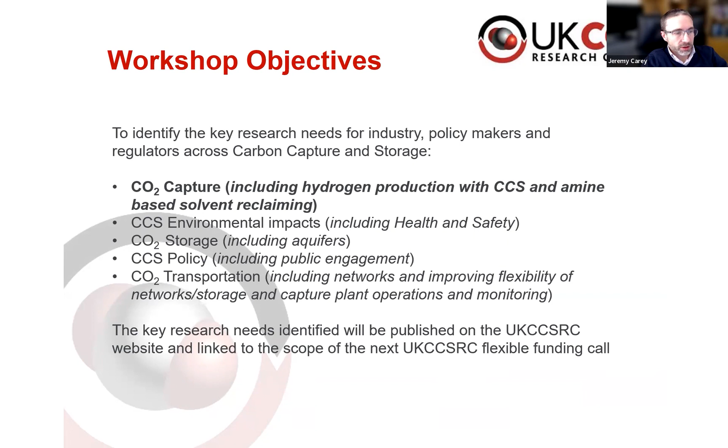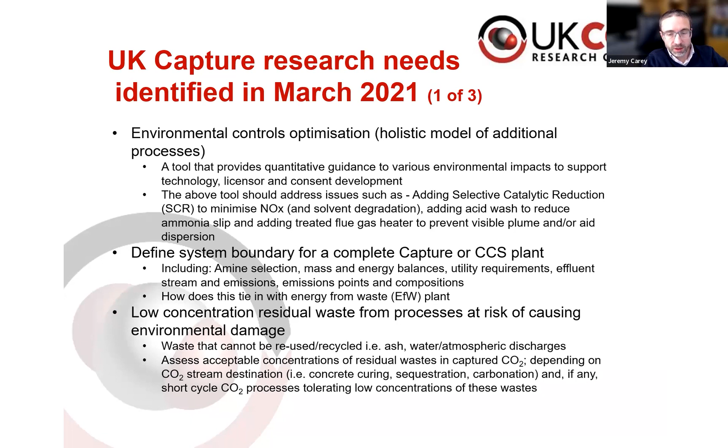Building on some work that's been done in the past around research needs that have been previously identified. There is obviously ongoing interest in environmental controls. There's the interesting question of where do you draw the system boundary. There's dealing with waste and kind of risks of consequential environmental damage.

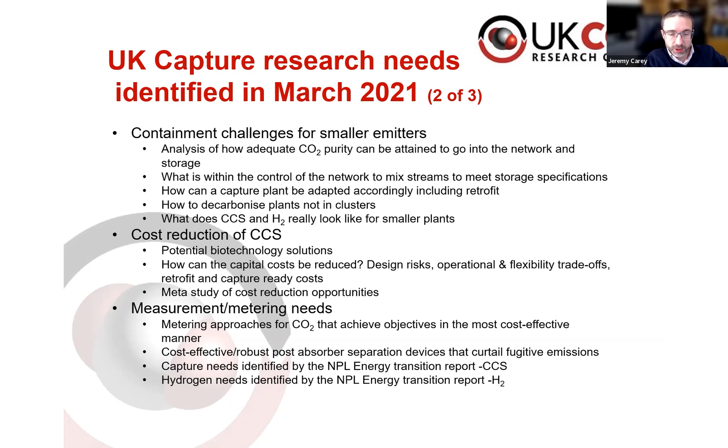We've got the challenge of smaller emitters. There's been a number of little bits of work done recently on how much CO2 is enough to make it worthwhile capturing it. The ever popular challenge of cost reduction and measurement and metering, particularly fiscal metering, I guess, in there, and concentrations.

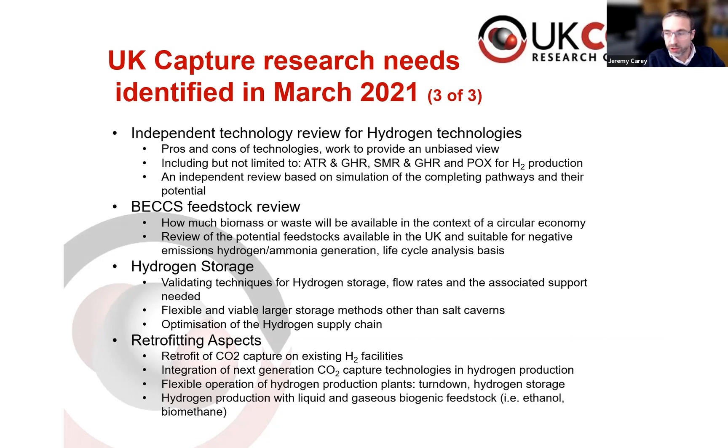But before we get into all that, we've got these series of presentations, and I think the first one is from Petrofac. So I think we're ready to go to Chet.

Good afternoon, everyone. I'm Chet Biliyok. I'm the technical director at Petrofac Energy Services. I'm pleased to present to you what I think are the research needs for carbon capture and hydrogen. This is based off experience of projects we've recently delivered or we are currently delivering right now at Petrofac. Just a bit of information about Petrofac.

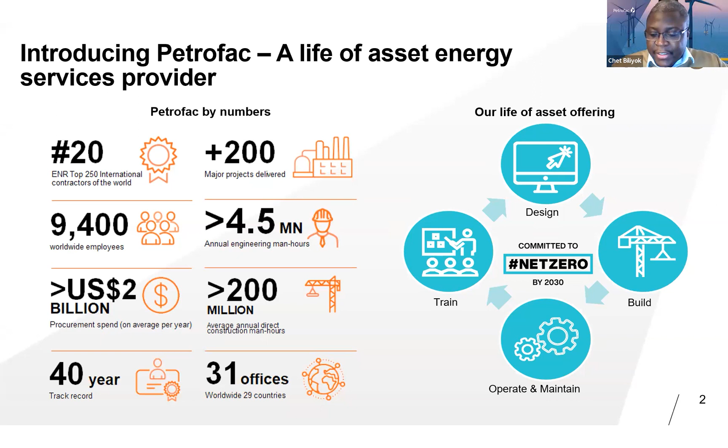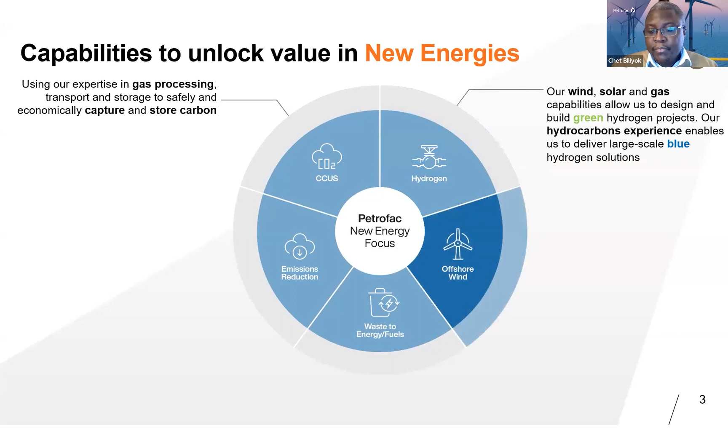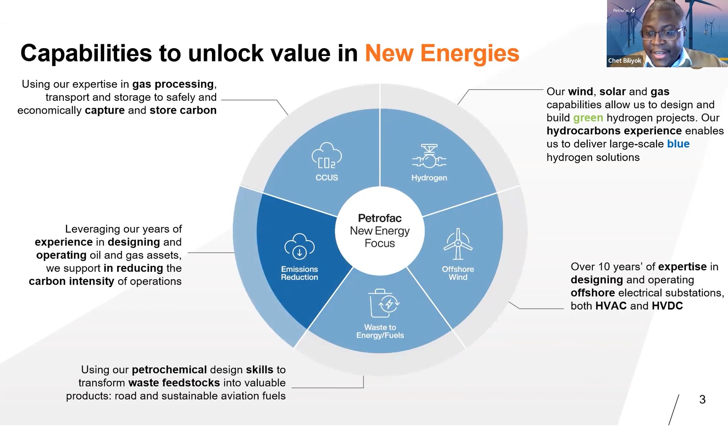We are an entity, we deliver energy projects. Beyond that, we also do O&M, train, operate and maintain. I also do some training. I'll skip through these slides pretty quickly and tell you about new energies, the arm of the business where I sit. We look at CCUS using our existing knowledge from oil and gas to do carbon capture and sequestration. Similar with hydrogen, we've been doing offshore wind for over a decade now. Waste to value, waste to energy, we do that as well, and then emission reduction, helping our existing clients to reduce our emissions. So now that that's out of the way, just a little bit about Petrofac.

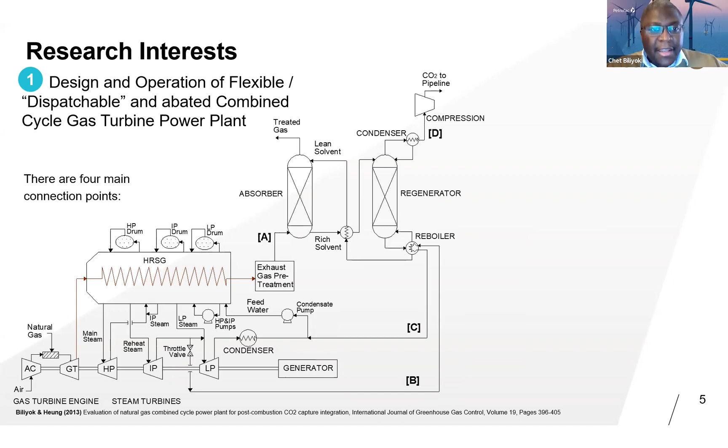I'm going to go into some of the areas where I think research will be really good, going forward, at least over the next couple of years. And the first area I picked is I went back to my academic years over a decade ago when I was doing research in CCUS, and that is design and operation of flexible or dispatchable and abated combined cycle gas turbine power plants.

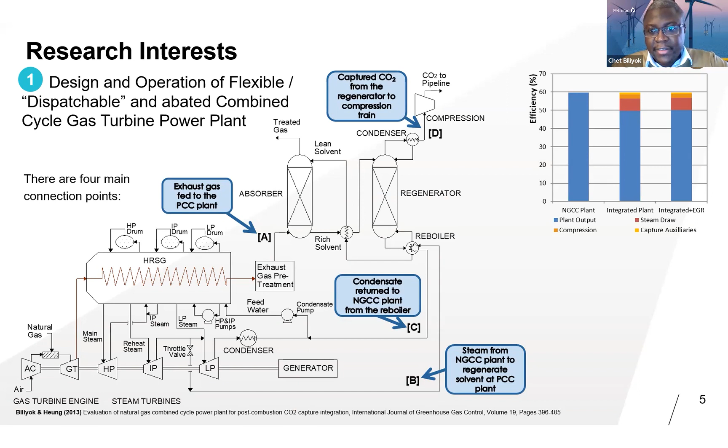Previously, when I looked at this, I really focused on the design, trying to couple it together, looking at all the key integration points or connection points, which are energy losses or parasitic loads on the plant itself. At the end of the day, you can do other things to make it more efficient. But I think now with what we are seeing...

A week ago I was looking at what was on the grid, and gas was providing 40% of the electricity on the UK grid. With Net Zero Teesside going forward, our projects, and SSC, and with the way the business model for CCUS, particularly power CCUS, is currently shaping up, dispatchable power from combined cycle gas turbines that is abated, with emissions abated, would be key. This will be slightly different, a lot different, from what we've been currently designing, which is very efficient, very tightly coupled.

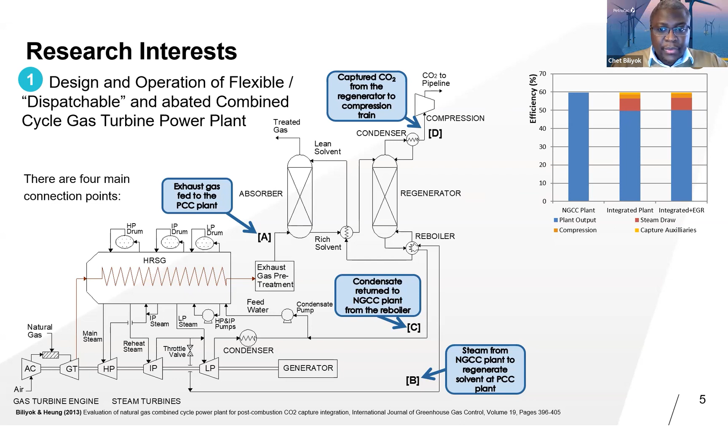So one of the things that I'm looking at is how do you manage that trade-off between flexibility and efficiency? What are the things you are going to look at? In the past, myself, I've been guilty of it. I've focused on building high fidelity models of the capture plant, modeling mass transfer and chemical kinetics. But at the end of the day, when you look at the system overall and how it behaves, the main focus is the turbo machinery and the system hold up, particularly in terms of how you are going to run it flexibly.

So what should we be looking at going forward? Back pressure gas and back pressure turbine is something that has been pointed out that will make it very efficient. Also rich solvent storage, storing your rich solvent and regenerating at the appropriate time. What kind of other operational strategies can you look at?

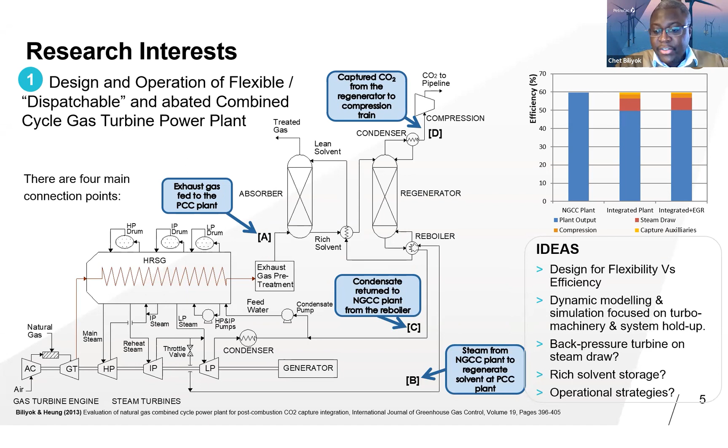So there are a lot of things you can do. I think one key area, particularly with the kind of projects that are coming up and being developed now, is really looking at how you can run this plant very flexibly and ensure that they're able to maximize revenue from the business model that is currently being generated.

So before I go into the next point, I'll just point out that this next research area, I think, is a good focus. It's coming out of the work that Petrofac is going to do in the Stockholm Exergi project, where we are delivering a FEED project for the capture plant and associated units, that's compression, liquefaction, and on-site storage for the combined heat and power plant.

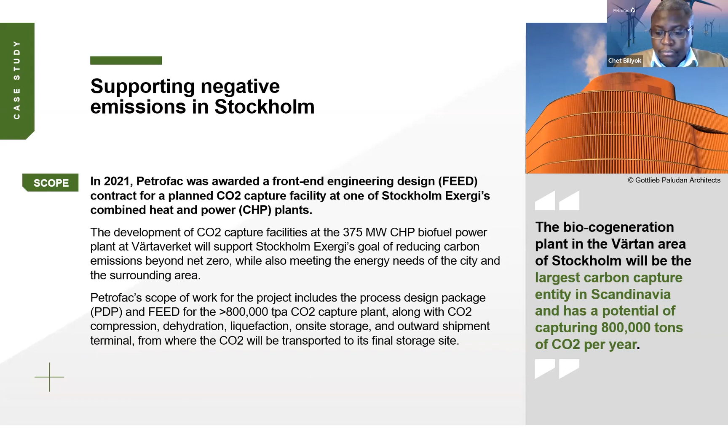That particular project, one thing that has become quite interesting in terms of the decisions that need to be made is: at what condition do you store the CO2 that you've captured? What condition do you store it, and what condition do you then transfer and offtake it?

Perhaps in the UK this is not such a big issue at the moment, but we expect that, for example, Acorn, which is at reserve status now, will probably move forward as well, and it has an import terminal. So when you look at what's going on, Northern Lights, which will be taking on a lot of CO2 from around Europe, the specification is medium pressure CO2, around 14 to 15 bar gauge, minus 30 degrees Celsius storage, and that's the pressure that is used for transporting.

And if you look at what Acorn, particularly the import terminal, is shaping up to, we're looking at lower pressure, about around 7 bar, and minus 50 degrees Celsius storage temperature. I've seen other studies that have come across our way a few times where people are also looking at high pressure. What pressure really, or what conditions, do you want to store and transport this CO2?

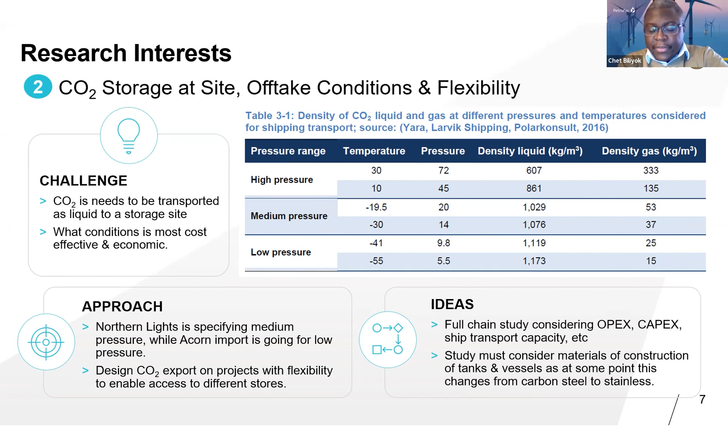And even when you are looking at CAPEX, it's not just different size of vessel, a bigger vessel or whatever. There's a point where you can no longer use low temperature carbon steel; you have to switch to stainless steel. So how does all of this impact the overall viability of that particular storage condition or transport condition?

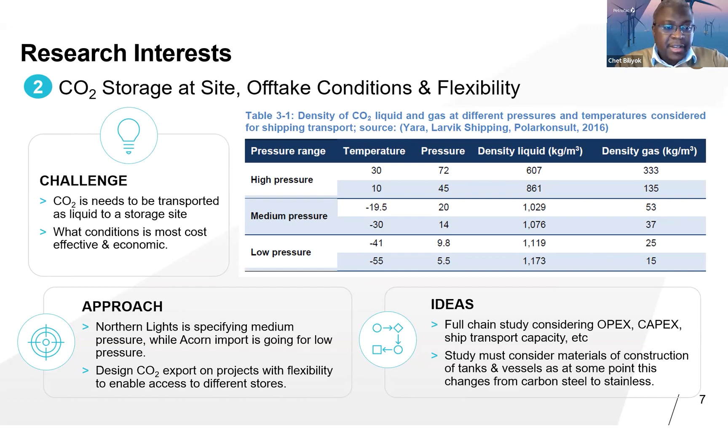So those are questions that really need answers as these projects are moving very quickly going forward. We've talked about, at least Jeremy mentioned, hydrogen storage as one of the items I was pointing out last time.

Again, this is critical, because looking at one of the projects we did here at Petrofac, a feed project, not blue hydrogen in this case, green hydrogen, but it affects blue hydrogen as well. You need to store hydrogen, particularly when you look at things like energy storage and curtailment. You need days of inventory storage of hydrogen, which is not something we normally do. Hydrogen is generated and used almost immediately.

But if you are going to store this large amount of hydrogen, how do you do it efficiently? At the moment, it's only salt caverns that are efficient for large storage, but we can look at other means of doing it.

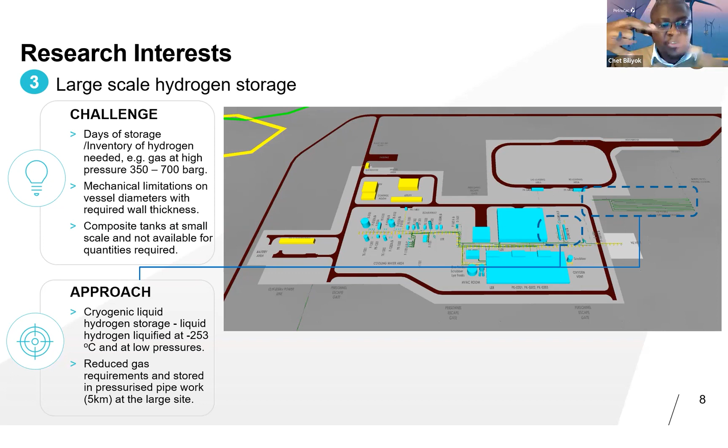In the project that we did, we used a cryogenic liquid approach, which is quite energy intensive. We also used a line packing approach to store hydrogen on site. But how do you then store hydrogen efficiently and in a compact manner, particularly if you don't have a suitable aquifer close by? As a liquid, cryogenic hydrogen requires a lot of energy; as a high pressure gas, there's a lot of volume and a lot of space needed to store it.

Are you looking at ammonia? Are you looking at methanol? Are you looking at metal hydrides? How are you going to store that hydrogen effectively, and what kind of numbers are we looking at?

So again, similar to what I mentioned with CO2 transport, it has to be a full chain study. That means it's not just storing the hydrogen as ammonia, but also considering the energy usage and energy cost in cracking that ammonia when you want to get your hydrogen back. It has to be a holistic study, because perhaps there are other means of storing hydrogen that are more energy efficient.

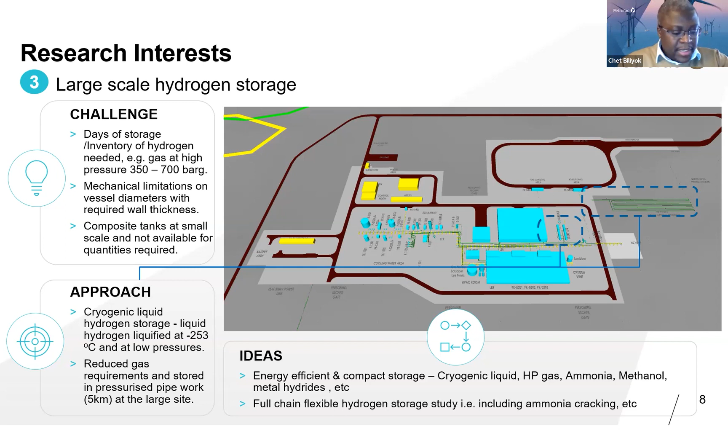Now, the final point I'll make as I come to the end is hydrogen demand. There's a lot of focus on supply - yeah, blue hydrogen, green hydrogen, we are going to generate hydrogen, we are going to use it.

But I'm sure some of you have seen this hydrogen ladder by Liebreich Associates. This is something I really agree with, because at the moment, when you look at the demand for hydrogen, the uptake is what we use hydrogen for currently - for ammonia, fertilizer, for hydrocracking in refineries, for methanol.

When you look really closely, what other demand can use hydrogen for where viable alternatives do not exist? Not many. So a robust, market-driven study of hydrogen demand is needed, not just saying we are going to supply hydrogen. We need to show that it makes sense. As an engineer, I struggle with some of the numbers I see, and I'm hoping that going forward it will be clear that there is that market, that demand for hydrogen, rather than a 'we build it, they will come' kind of approach.

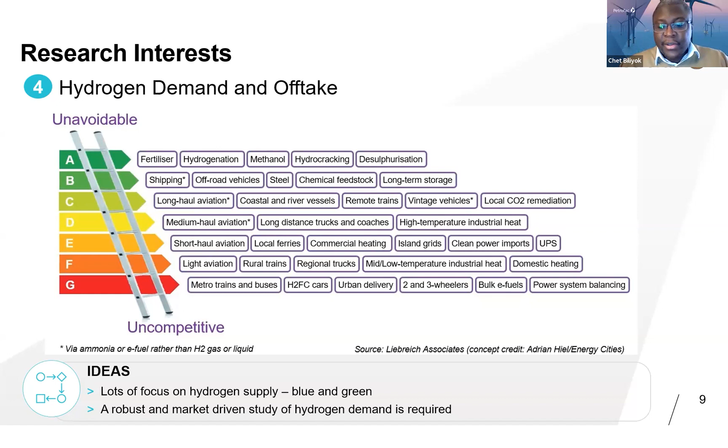I'll stop there, and I'll hand off to the next person.

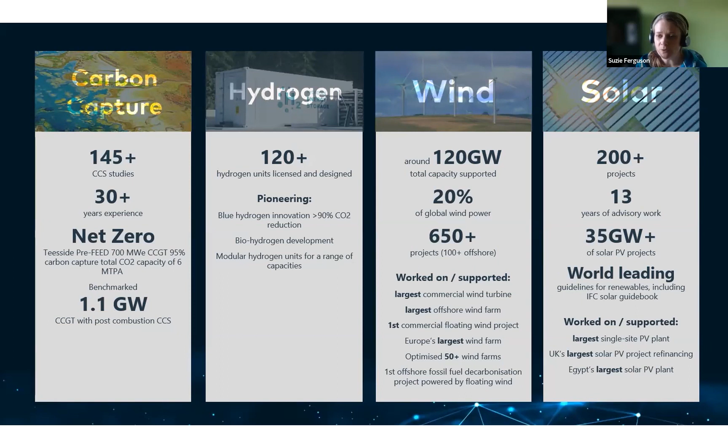But we're now pioneering new innovations in lower carbon footprint hydrogen generation. We're also very heavily involved in wind and solar around the world as well. So we've done all kinds of different projects that quite often have different interactions between the elements of decarbonisation or elements of the CCS chain. But I won't dwell on these for now.

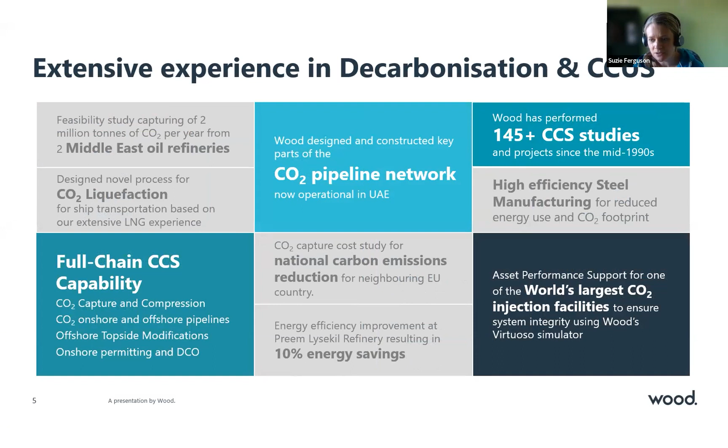But a project that I wanted to mention that might be of interest from a hydrogen and post-combustion CO2 capture point of view is the Humber Zero project. I'll go through it briefly because I know Mayowa is on the line and he knows far more about it than I do. This is a really exciting project looking at creating a low regrets pathway to rapidly and cost effectively decarbonize the huge industrial cluster up on Teesside, up on Humberside, that is based around Immingham, where you've got 2 oil refineries, a power station, and various other really significant industries that are going to be challenging to decarbonize.

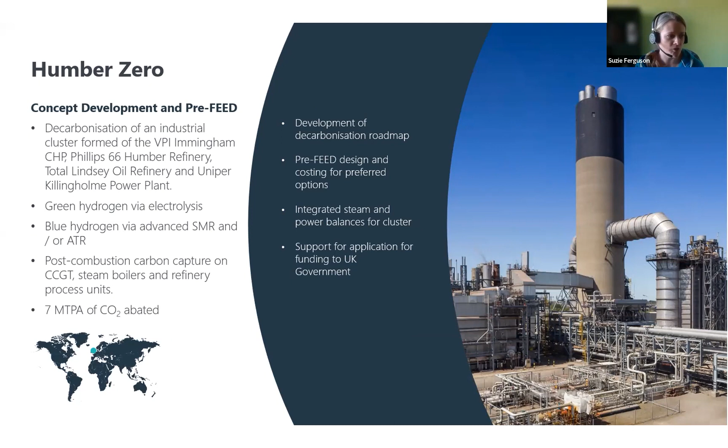So the project was looking at how you can use synergies across different sites to, say, take excess fuel from one site and put it into a power plant on another site with post-combustion, and then generate hydrogen and use that for decarbonisation on a third site, for example. So some really exciting interactions, but it led to a great many questions in how best to design systems that can have so many variables. So I'll come to that hopefully in a minute.

Another really exciting project that we did last year was to come up with an energy transition master plan for SGN, who wanted the scope of their project to look at decarbonising 80% of the gas grid in Scotland. So pretty broad. That looked at who's going to be the hydrogen users, who are going to be the people that are going to need to use post-combustion carbon capture and can't decarbonise with hydrogen.

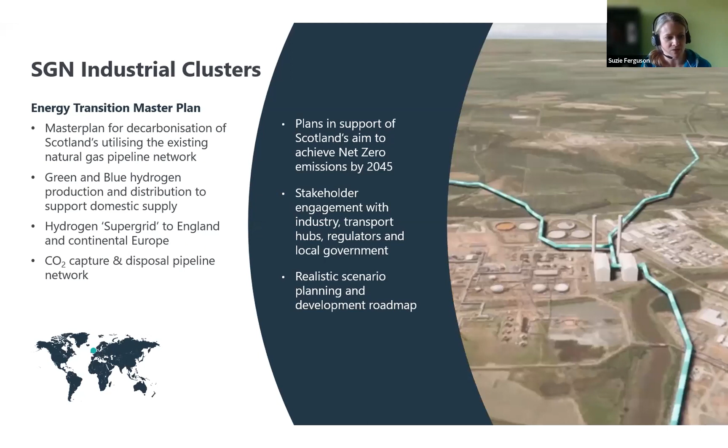What are the sectors of the industries and society that will be more likely to choose electrification, like vehicles or small passenger vehicles, for example, and to pull all of this together to say what will the hydrogen demand be like by 2050, 2045 mostly, is more important in the case of Scotland because that's when they have their net zero target. So this also raised a huge number of questions, not just about CO2 capture, but also about hydrogen with CO2 capture, and when we're blending blue and green hydrogen, what are the differences in the markets that they can supply?

And then also last year, we were very fortunate and grateful to win 2 lots of the UK's hydrogen supply programme for BEIS. So this enabled us to do some feasibility study work, looking at taking that hydrogen technology that we've had for decades, that of course, being a grey hydrogen technology, emits 10 tonnes of CO2 for every tonne of hydrogen you make, and to transform that into a technology that is fit for a net zero world.

So of course, we've modified the flow scheme to come up with a blue hydrogen flow scheme, which has got integral CO2 capture rather than post-combustion on the back. But also, can we change that into a biohydrogen technology? Can we put bio feedstocks into our reformer, and what is the potential for making biohydrogen that's carbon neutral, or potentially even putting it into the blue hydrogen flow scheme, which would make carbon negative biohydrogen.

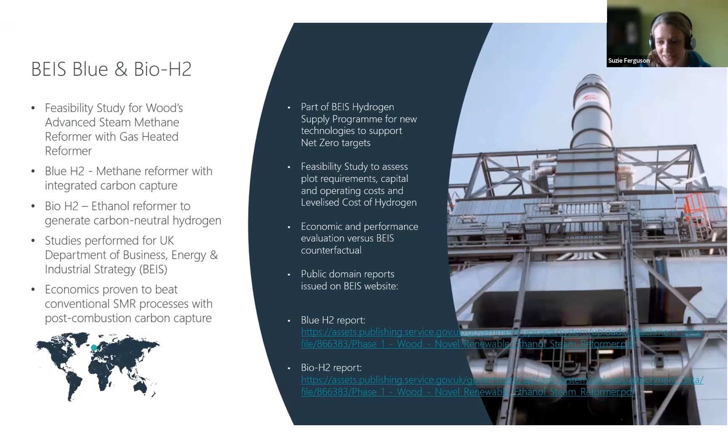So that was a super exciting project, but again, it led us to have lots of questions about market implementation, requirements for purity. So I've tried to capture some of those here.

So particularly on CO2 capture, of course, I'm sure everyone will be aware that there's been this long-running debate about proprietary versus non-proprietary solvents. And we are frequently asked by clients or potential clients about open art solvents and whether or not we would consider them as a demonstrated technology that could be used by 2025 or 2030, and where they've got to. So it would be great if we were armed with better data so that we could perform more strong designs.

We can take MEA at various concentrations and model it in HYSYS, Promax, or any of our processing software. But the things that are very difficult to predict are things like what the emissions will be from the absorber, from water wash stages, acid wash stages, and how effective demisters are - things that are really much better done through lab testing and on-site testing than through our simulators.

Because if a company like Wood is to deliver one of these units, we need to be able to provide a performance guarantee for how well we can ensure we've got rid of any emissions that could be harmful to the environment, as well as what the emissions to water would be.

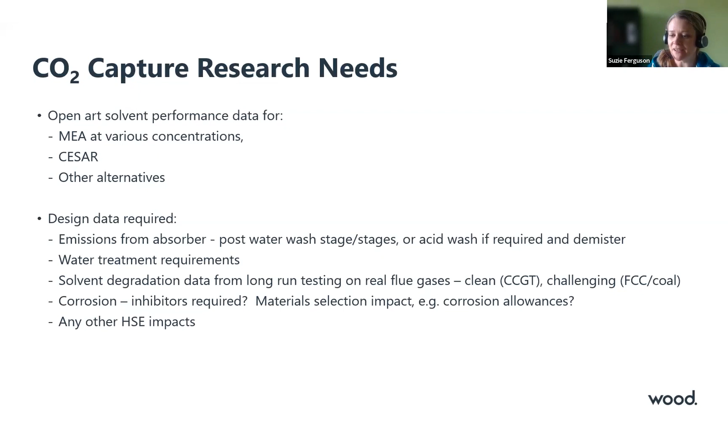I'd just like to caveat that it's been a very, very hectic couple of years. I haven't necessarily kept up with what research has been coming out, so I apologize if any of this is already out there - and if anyone's listening pulling their hair out saying 'I published that last year,' sorry, I'd be very interested to see it.

So the next one I've got is about emissions from the absorber. Obviously this is a crucial concern for everybody from an environmental point of view in particular, but also from a solvent loss point of view it can be very important.

It can be very difficult when starting a project to know what the limits actually are, and to be fair, what the limits should be, because some of the research done at TCM, for example, has looked at how much amine has ended up in the environment - and they're finding that there was already more amine in the environment than they could detect additional amine from the project, if that makes sense.

So what should our emission limits be, and how much do they vary from one place to another? Because if you're designing a project in a location where there are already many industries with emissions allowed by the Environment Agency, the limits on your new plant will likely be very strict, which could be quite limiting compared to another location. We've had that example with ammonia on Teesside.

It's also important to understand what appropriate limits there are for SOx and NOx. When you're doing post-combustion CO2 capture, you're reducing the mass of the stream you're emitting to the environment, which increases the concentration, although not the quantity, of SOx and NOx. So it's important to understand the limits and make sure we're always below them.

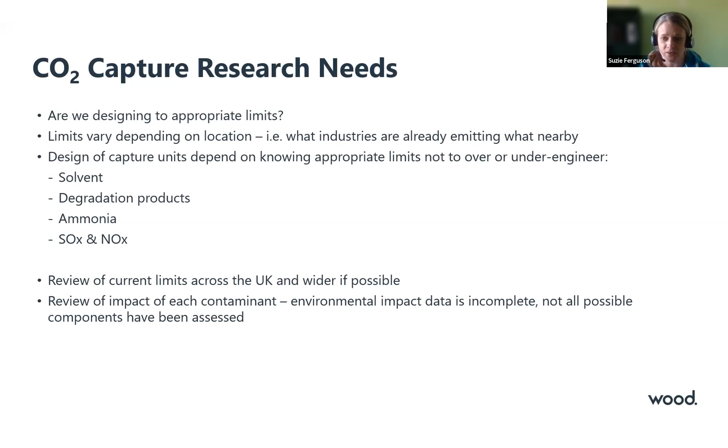Then we've had lots of fun talking about CO2 emergency venting, and on the very odd occasion finding a project where we've done due diligence to find that there is no CO2 venting in the design, which is obviously something that needs to be rectified immediately.

So when CO2 is vented, of course, there's potential, depending on how it moves across its own phase diagram as it's let down, that it could form snow, it could plug up pipes, or of course, ultimately, the crucial thing is to make sure that you're not going to do any harm if there's an emergency situation because of the asphyxiation potential. But making sure that we model CO2 properly is absolutely vital.

And it can change quite a bit depending on the amount of impurities that are in the CO2. Just 2% hydrogen in the CO2, for example, can have a huge impact. And we need to make sure that we know exactly how that CO2 is going to behave in CO2 emergency venting scenarios.

Some really interesting work that we've done in the last year or two has looked at how to minimize the inventories that could be vented, so we'll have less flow of stuff being vented, but to make sure that we've properly understood how we need to manage that venting to do it in a safe way is something that we need to ensure our models are capable of achieving. And I'm talking about the thermodynamic models that are inbuilt to the modeling software. So I think we could really do something interesting to make sure that we're doing that in as robust a way as we could do, accounting for the impurities in CO2.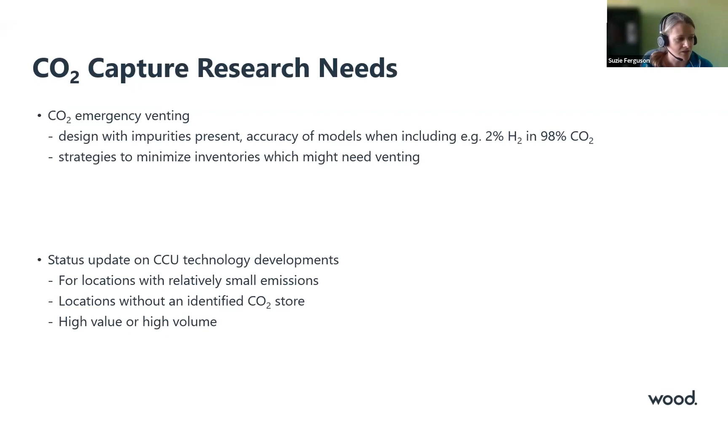So it would be great if there was some sort of forum presenting where they've got to, or a side-by-side review of the different technologies and their markets in the UK, either as a high value product or a high volume product that could look at taking a bite out of the amount of CO2 that we're going to need to sequester.

And then to move on to hydrogen. Again, hydrogen purity requirements are really important, and they will impact on how much energy and how much capex you spend on the design of your plant. For example, there's very different hydrogen purity requirements at the moment for a vehicle recharging station for hydrogen fuel cell vehicles, than there is if you're going to use your hydrogen to blend with natural gas or with refinery fuel gas for reducing the carbon footprint, rather than a full switch to hydrogen.

So it's useful to look at what are all the different purity requirements and how they impact on things like the materials of construction that can be selected for infrastructure, what the fluid flow impacts are of impurities in hydrogen, because they can be really significant, and also what the carbon footprint of those impurities might be. Obviously, if you've got 2% nitrogen in your hydrogen, then that's not impacting your carbon footprint. But if it's 2% methane, then it absolutely is.

Then another question we come across quite frequently is the understanding, and Chet very rightly pointed it out, that it can be very difficult to work out the best way of storing hydrogen. And while some geographies have salt caverns or the ability to create salt caverns, many do not. For example, the whole of Scotland does not have identified areas where they could build salt caverns.

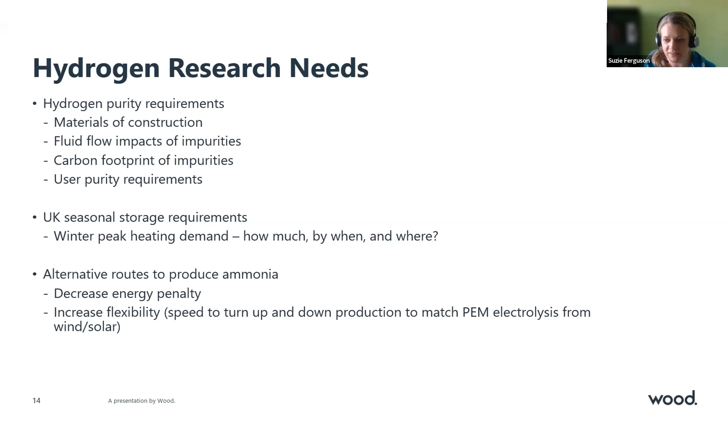But they are all going to require usage, and it's really important that we understand the carbon footprint of all of these. I'm sure a number of people will have seen the very controversial article published about this time last year that said hydrogen was worse for the environment than coal, or words to that effect. At Wood, within a few weeks, we put out an article which took apart this analysis and pointed out all of the assumptions that had been used to snowball into a really unrealistic conclusion from the use of selective assumptions.

But it would sound much better if it wasn't coming from a company that had a clear vested interest in producing hydrogen. So I think it'd be really useful, certainly for the public, but also for those of us heavily involved in the hydrogen supply chain, to see a really independent review of the carbon footprint of the different ways of making hydrogen.

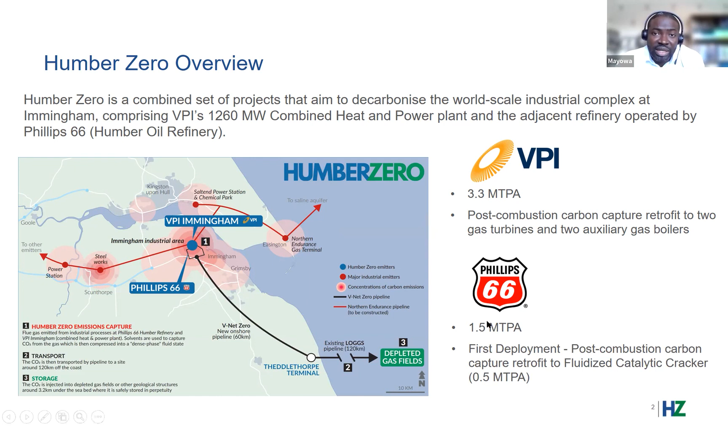So VPI is developing the post-combustion capture on the CCGTs, which is one of the biggest CHP plants in the UK and in Europe. And Phillips 66 are developing a post-combustion carbon project on the back of the FCC, which is going to capture up to 0.5 million tons per annum. But there are other aspects of the project that will push that number up to 1.5 million tons per annum, notably around the calciner. So between VPI and Phillips 66, these 2 projects are currently being developed at an advanced stage as well.

Let me give you an overview of the VPI Immingham plant. As you can see, we've got 3 gas turbine machines. 2 of them are within the scope of this project, highlighted here as GT1 and GT2, and also the 2 auxiliary boilers which support those assets. The project scope is built around those 4 critical assets: the GTs and the aux boilers.

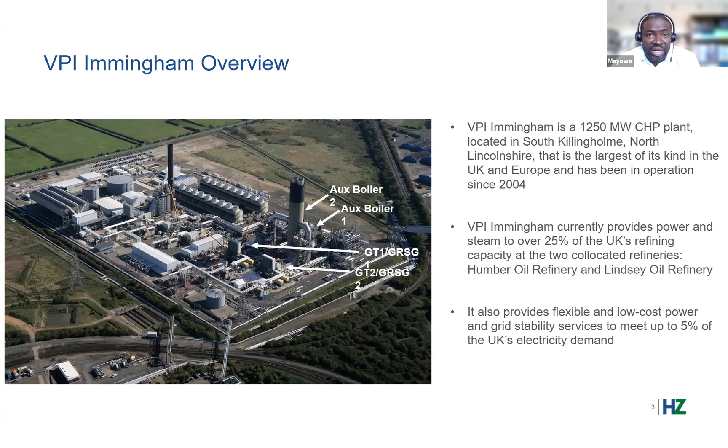I'll show you what that scheme looks like in the next slide. As a scheme, we are proposing a capture plant train on each of the gas turbines, around 1.4 million tons per annum each, and 500,000 tons per annum on the 2 aux boilers. Those 3 trains can then be combined into 2 trains of compression and dehydration before going into the transport network.

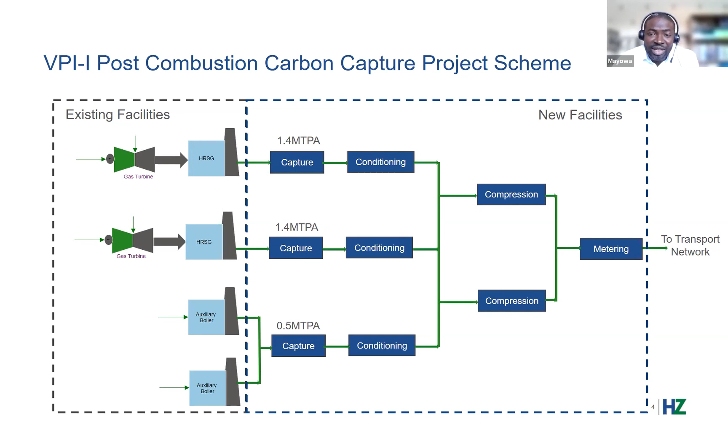Now, this is the scheme as it currently stands, but we continue to work on this, and it's very possible that if you speak to me in 6 months' time, I might present a different scheme. Not terribly different from this, but it could be different.

Within the time we have, let's talk briefly around the key project features, and hopefully identify some of the key challenges we see in the project. Those challenges can then be turned into research or focus areas. So first, let's go through the key features of our project.

First is an amine-based post-combustion carbon capture technology. We see steam integration and condensate management as a key aspect of this, because this is a CHP plant. That means there's a base load production of steam which goes to the 2 refineries, the Humber Oil Refinery and the Lindsey Oil Refinery. Integrating a capture plant means there's another big consumer of steam, so we have to integrate all of this steam into the design.

There's flue gas integration. In the earlier picture of the plant, you will have seen a big stack in the middle of the site, where all of the flue gas is routed to the atmosphere. Bringing the flue gas to the capture plant means we have to find a way to tie in the duct to the stack. And because there are 4 stacks, we need to find a way to tie them all together and commingle flue gases where necessary to deliver safely to the capture plant. That's a key feature of the design, and it's a lot of engineering effort to get done correctly, involving designing and controlling the flow of the flue gas.

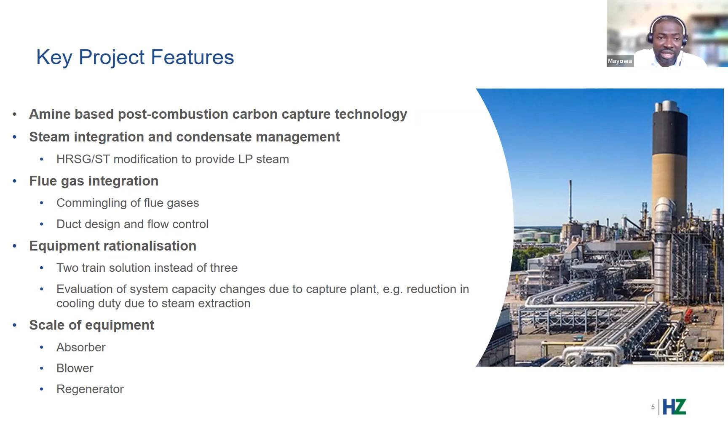So challenges which we think could present some research opportunities. Some of these are common, you will have heard them before, but maybe there's some that might be coming out for the first time. This is what we're thinking.

The first one is around modeling of the dense phase CO2. We see the prediction of risk contours, for example, when modeling unintended release of dense phase CO2 in the presence of impurities. We ask ourselves: have we got the right models? Are they predicting the contours correctly? Are we grabbing too much land than we need, or are we using too little? Are our current tools the right ones to use when we have impurities in CO2?

So doing something along those lines to make sure we get confidence these tools are predicting the contours correctly. Measurement, online measurement of impurities in dense phase CO2 - we have very strict conditions to meet in terms of the purity of the CO2 and some of the entry conditions as well. So we need to monitor them, to determine that we can correctly measure impurities in the CO2 online, almost real time, so we can take responsive action to either divert the flow or take corrective action to bring down the contaminants. The question is, have we got the right capacity to do that in terms of the availability of equipment?

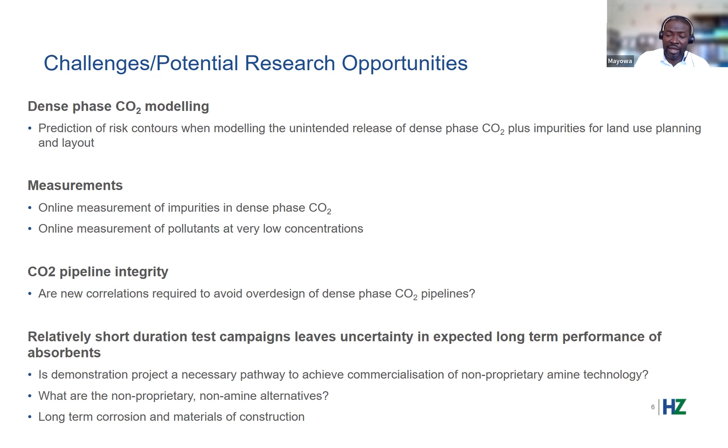Again, one item that is important is corrosion. It's tied to the long-term performance of amines. Corrosion could become a problem when you look at what's being offered by different technology providers - you notice a big difference in the sort of materials being put forward. It's not consistent, even though they're all amine products. So are we getting this right? Because we literally don't have any plant that's been out there for 20 years or more. It's just something we can do in this area to bring confidence that the right materials have been selected for projects of this nature. And I think that's it from me.

So I'll hand over to Adam, who's going to take us through Phillips 66 refinery.

Yeah, thanks very much, Mayowa. So yeah, my name's Adam Wharton. I'm the process engineer on the decarbonisation team at Phillips 66. The refinery is based in the Humber region. We employ over 1,000 people. We're unique in Europe for our ability to produce graphite electrode battery coke, which we're continuing to invest in and increase production of to provide for the emerging electric vehicle battery market.

We're the UK leader in the production of low carbon liquid fuels and the only domestic provider of sustainable aviation fuel, through our processing of renewable feedstocks like used cooking oil. We also have a roadmap to reduce our refinery emissions, which firstly sees us working in a consortium with other partners to develop our Gigastack project to produce green hydrogen for the refinery, where we can hopefully refuel various fired heaters. Most pertinently to this is the Humber Zero project, which Mayowa has introduced, where from our part we are looking initially at a carbon capture unit on our fluid catalytic cracker. There are other sources around the refinery, but we've selected that one to start with - it's the largest single source emitter.

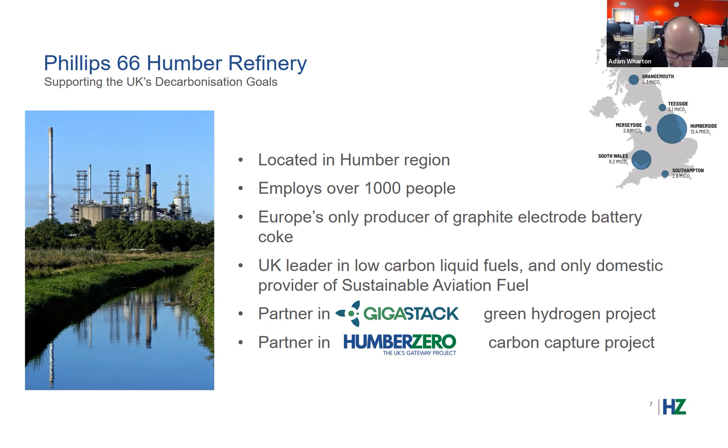Our research opportunities are broken down and demonstrated by the challenges we've faced so far. Many are the same as the ones that Mayowa has been through, but there are additional ones that need to be considered when integrating a carbon capture unit to an existing industrial unit.

Flue gas composition will be different depending on the industrial unit. It's important to have accurate knowledge of that composition, all the different components and contaminants, to understand how they'll affect the amine degradation rate and the propensity to form aerosols. That understanding then helps specify the extent of pre-treatment required for each particular industrial unit. As an example, a key feature of the FCC flue gas is the catalyst fines, which we currently knock out the majority of with existing kits to below environmental limits, but it's still not sufficient for a carbon capture unit. That's what we've found so far, so additional treatment is required.

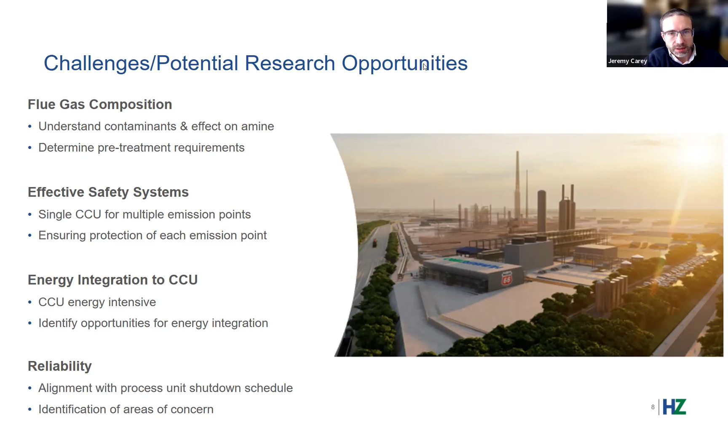I think next up we have somebody from Net Zero Teesside - I guess it's you, Alex, as you've popped up. Very good to see a lot of familiar names. My name is Alex Tait. I'll give a bit of an intro as to what I do in a second, but just to start with, I work for BP.

BP is the operator of the Northern Endurance Partnership, which was successful as part of the East Coast Cluster in the phase 1 process in terms of getting a transport and storage regulator on the go. So that's really good news for us. We also, as BP, operate Hydrogen Teesside, H2 Teesside, and Net Zero Teesside.

On the capture side, I'm going to speak specifically about Net Zero Teesside Power - the power station that's going to be co-located with the Teesside infrastructure. It will produce roughly 2 MTPA at the peak. It's a greenfield CCGT integrated design, and I sit in as a project lead, managing and coordinating some of the interfaces between two FEED contracts, which we set up in December of last year. We were really delighted to kick off two FEED contracts last year, one with Technip, GE, Shell, and Balfour Beatty, and another with Aker, Siemens, and Doosan Babcock.

So we have power OEM, licensor, engineering contractor, and construction contractor on board together from the start, working these two FEEDs. The dual FEED - they're working in parallel at the moment, and I'm sitting in the central team that's managing those. There's a lot of work ongoing as a project. I would say from the start that we have quite an extensive technology qualification process and plan, and a lot of that now is work that the engineering contractors are doing with suppliers and others to qualify that technology, ready to support a financial investment decision next year.

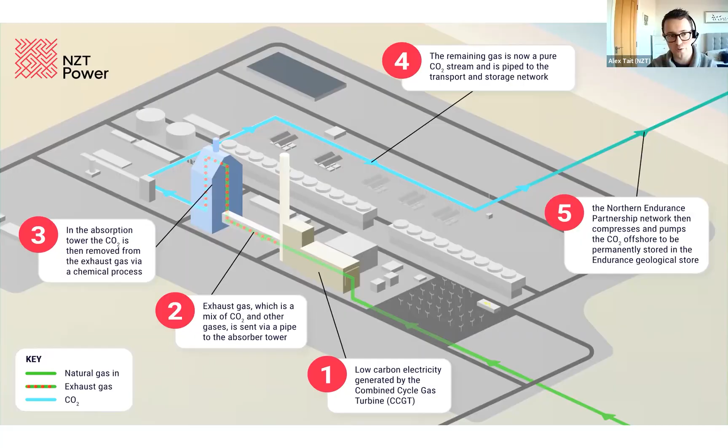I've put together some of the key technology areas that apply to the capture plant, and some of the needs we've identified that we may want to address, particularly over the next year. Hopefully this helps you identify where the critical research needs would be. It's really encouraging to me to see a lot of alignment across the four speakers I've seen beforehand.

Chet talked about the need for dispatchable power and the intricacies that come with that. I'll talk about that too. Mayowa and Susie as well, talking about aspects that will come up quite frequently here. So I'll work through these.

The first one is repeating some of the previous stuff we've talked about in terms of scale-up. We recognize there are two large scale coal facilities that have operated with good experience. But with natural gas flue gas, there's obviously a very different technical setup.

For us, there's a lot of work to do, particularly around the blower and the diverter, and the absorber as well. So we expect there'll be a lot of technical qualification to be done with the suppliers. I've listed a few things we'd be looking at doing there, and I'm sure there's potentially some interest on that amongst this community.

Equally, there's something that's well recognized about getting good gas distribution across what will be some of the largest absorbers of their kind. So there may be some work we need to do in terms of CFD modeling on that.

Something that I don't think has come up so far is specifically in relation to O2 removal and dehydration technology. This links in very strongly with an integrated specification for the CO2. We found that the O2 spec is really driven by the well design as well.

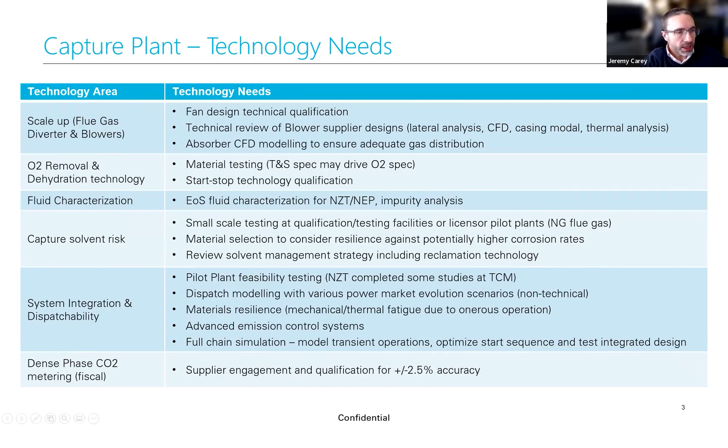I guess some of you would have seen in the programme that we're giving a slightly longer presentation tomorrow, but we've got these 5-minute sessions in each of the meetings this week. Part of that really is to try and re-engage with the CCS research community.

HSE was pretty heavily involved in CCUS stuff up until about 2017, just after the government cancelled those competitions, and then we sort of withdrew from the community. So we're trying to get back up to speed and understand what research has been going on in the last 5 years, to look to see whether some of the knowledge gaps that we were aware of at that time have been filled, and to see what other knowledge gaps may have arisen along the way.

Our focus previously was largely on the pipeline transport aspects of things. So it's been really interesting listening to these issues today on the capture side, and we're hoping to learn more as well later on the utilisation and storage side.

My background is on the science side. I was involved in things like CoolTrans and CO2PipeHaz, but I'm not on the regulatory or policy side, and some of you here may have questions on HSE's approach there. There was a presentation given by a colleague, Trevor Sexty, at a CCSA meeting last year, and that does set out some of those regulatory policy side of things. So if you're interested to learn more about that, please get in touch, and I can pass on the presentation that was given there.